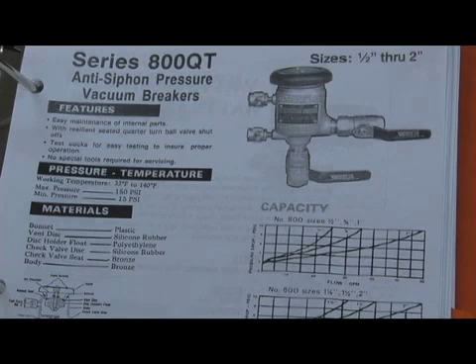So the original version was the Watts 800 series, which was produced from about 1982 to about 1993. Here's what the 800 series assembly looked like. Ball valves with the test cocks mounted to the body, which I'll show you the difference when we get to the M designations. Canopy on the top. Again, that's what the body looks like.

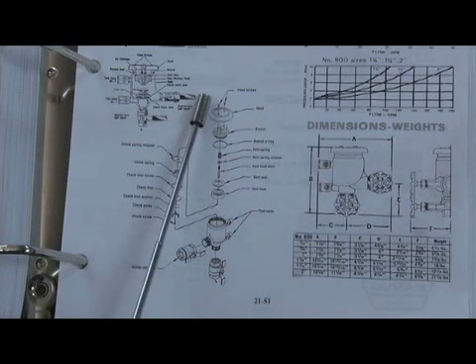Here's the internal parts with our check assembly, disc retainer, disc guide, disc holder, disc spring, check spring retainer, air inlet bonnet, poppet, and the spring and the bonnet assembly and canopy. So those were the parts in the 800 series. And again, this was produced from about 1982 to about 1993.

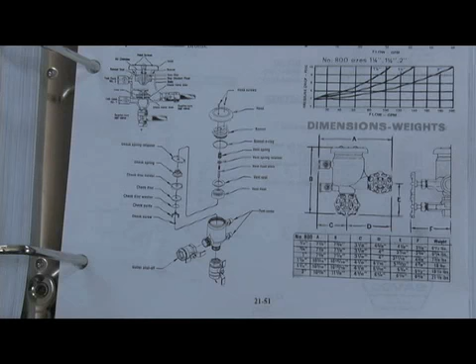In the early 90s, they started having a lot of problems with the air inlets being stuck shut or opening below the acceptable minimum of 1 pound. And they tried a lot of different things trying to get it to stop. One of the things they tried doing was epoxy coating the bonnet where the float disc sat, and other things. And then they finally just decided to remodify it and go up with an M2, M3 series. And let's take a look at those.

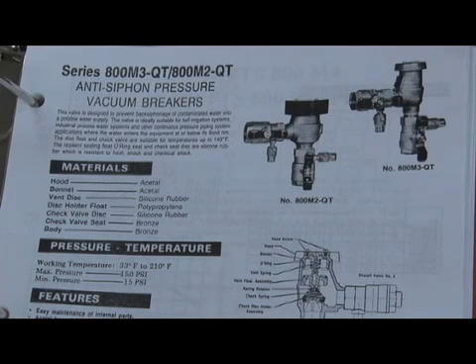The M2s and the M3s appeared different on the outside of the body. As we see here, it had a brass canopy on the smaller size. M3, M2s had a plastic canopy on the top, but the bodies even look different. This version of the M2, M3 was an upgrade of the 800 series, which they had troubles getting the air inlet open reliably. The check mechanisms were very similar. That same spring retainer design with that spring holder inside the body.

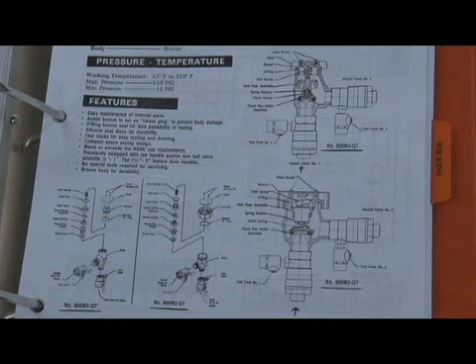What they changed was obviously because of the air inlet problems. On the air inlet, they went from a flat rubber disc to seal on the air inlet to an O-ring design, minimizing the amount of contact, which we'll show you when we take the assembly apart. So the dramatic difference between the M2 and M3 versus the 800 series: the check mechanisms were very similar, but the air inlets were dramatically different to help alleviate the problems they had with relief valve air inlet opening points below 1.

The M4 designation was the same M2 and M3 design as we saw earlier. The only difference was that the M4 incorporated a replaceable check seat. So the 800 series was the original version. M2, M3 were the modifications that changed the air inlet to have a more reliable air inlet opening. And when they went to the M4 designation, they used the same internal parts as the M2, M3, except they went to a replaceable check seat design. So 800, M2, M3, M4.

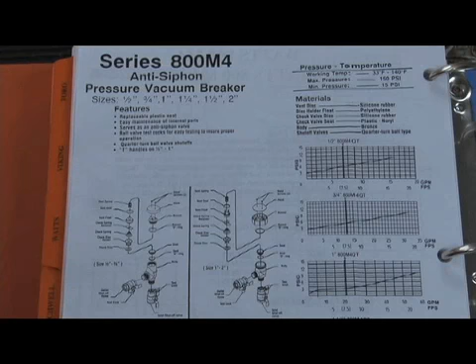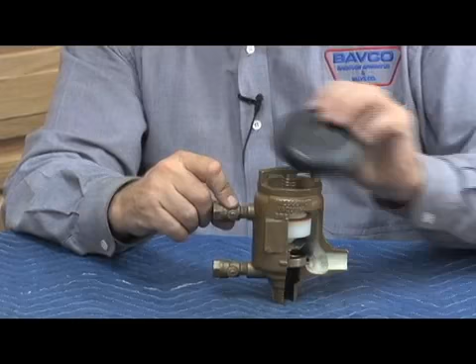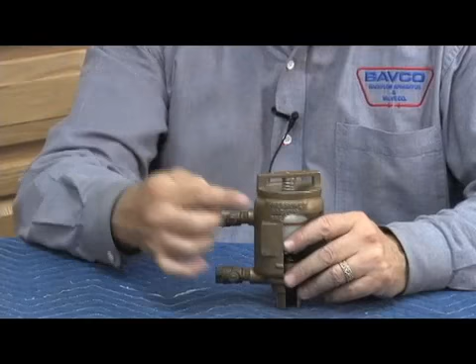But anyway, the canopy comes off the top. The canopy is an important part of this assembly. As we've said many times before, it makes sure things don't fall inside the body. Some people just consider it a splash guard, but it also keeps things from falling inside the body. The bonnet assembly unscrews from the top. It's a brass body here and a brass bonnet.

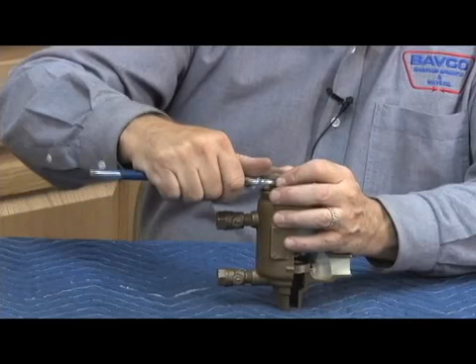To unscrew it required a crescent wrench, something like that, to break that brass on brass bond. On the 2-inch size, it got very hard to remove sometimes because of that brass on brass bond. Whenever you go to remove a brass on brass nut and bolt combination like that, it's not so much a strength issue. I can put a crescent wrench on here and put the strongest guy in the world on this, and it wouldn't necessarily be strength that would do it. It's a shocking action. Hitting it like that is what makes sure the bonnet comes off. The obvious problem with that is the piping system this is attached to.

You don't want to use that shocking action if you've got an old piping system, galvanized, rusted, ready to break. But that's the action you need to remove that brass on brass bond. The bonnet assembly unscrews from the top.

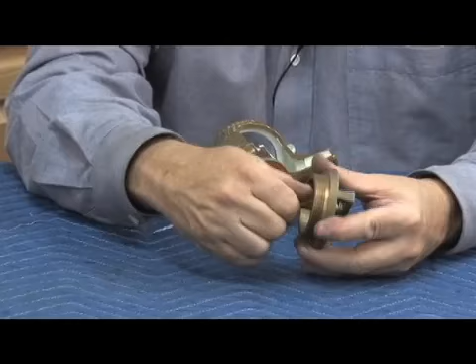The air inlet spring is set at the factory, and there is a little lead seal that's placed on the top of this stem, because you'll notice that this stem can unscrew out of here. And if I take that out, I can remove that air inlet loading, or I can actually change that loading, how it'll affect it on certain travel by moving that in and out. So the factory makes sure it's not adjusted in the field, puts a little lead plug right over the cover there, sets this at the factory.

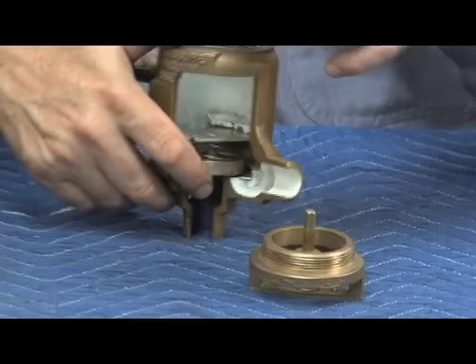Float assembly comes out next. Floats in one piece. They use a flat rubber disc as the air inlet disc, as you see right here, made out of silicone. Replacing the disc is just a matter of stretching it in and out of the holder, making sure it's all the way back into the retainer, just like that.

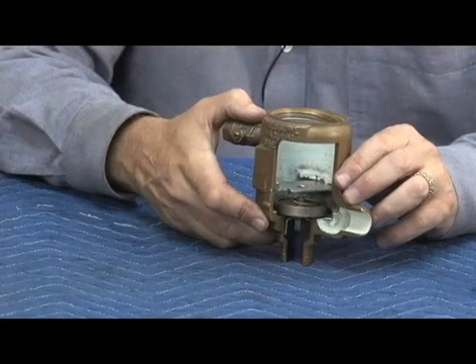Now for the check mechanism. Here's the part that causes the problem. Use a spring retainer. It looks like this. By pushing down, rotating it 90 degrees, it releases the spring tension, like that. Then the spring retainer will come out from the top. Spring, check assembly comes out next, just like that. Check seats are cast into the body. One screw holds the disc into the disc holder.

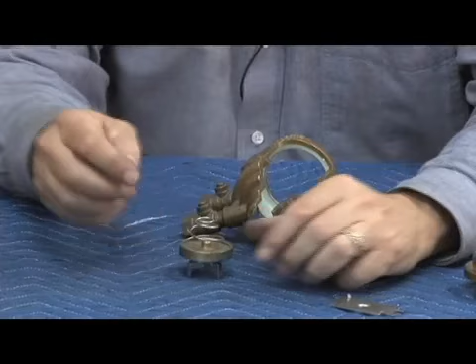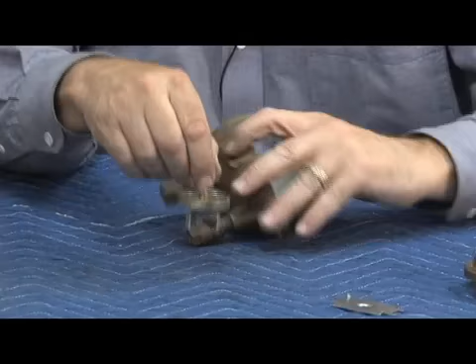Reassembly is a matter of putting it back together. After we change the disc, putting our spring back in here. It's a good idea to take that spring and just put a little tension on that clip. It'll hold inside the check body, which makes it a lot easier to get it back inside the body. So now we want to get the spring retainer in place, and the function of that spring retainer is to push down on that spring.

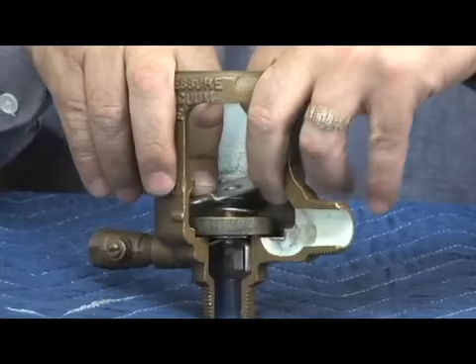Keeping this perfectly flat is critical to make sure the load on our retainer is pushing straight onto the disc holder. So we're going to insert it in from the top, pushing down, rotating 90 degrees, making sure that the spring retainer is sitting flat underneath the clips here and on the back side here. Making sure it's flat just like that assures that we're pushing down equally on that spring and giving us our loading.

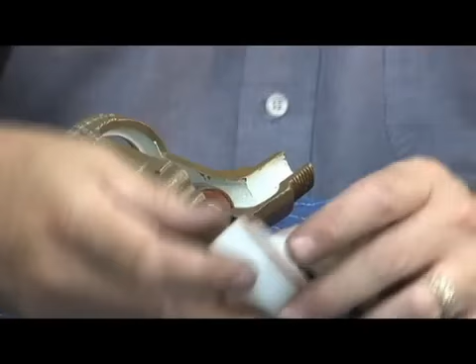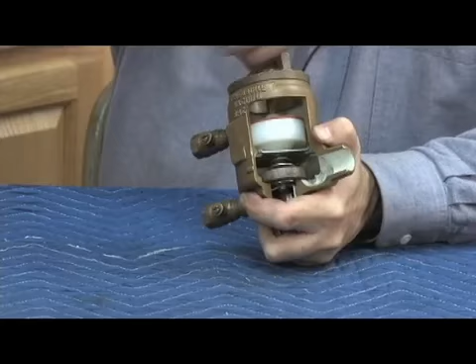Now, the air inlet, float assembly, we changed our disc. Bonnet assembly, O-ring on the outside. Reinstall back into our body. Allows us to reassemble. Again, it's an O-ring seal on the top, so the bonnet does not have to be overly tightened, yet unfortunately, because it's a brass-on-brass bonding, a lot of times removing it gets to be a problem. Don't forget to put your canopy back on top.

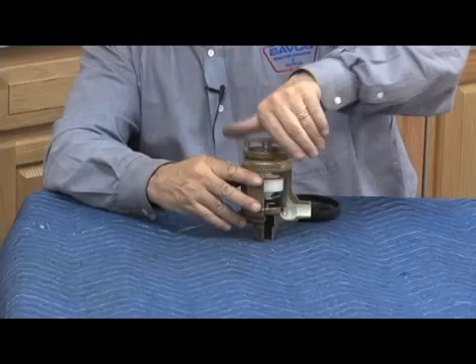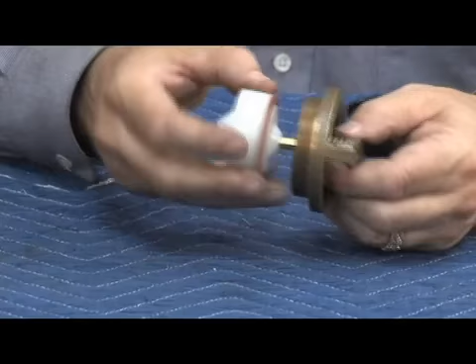That's the 800 series. Now, the problem they had with this design, and led to the revisions, had to do with this air inlet assembly. The air inlet assembly sits like this, and you notice it's a relatively wide disc area in relationship to the air inlet seat. And what happened on a regular basis is the spring loading, which was in this stem right here, made it so that the air inlet did not come off. And hopefully nobody adjusted it in the field, which they didn't because of the lead plug. But anyway, you can see the movement I have there.

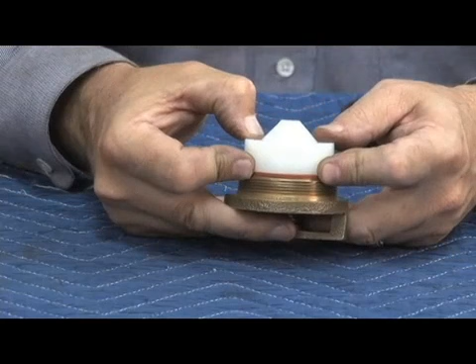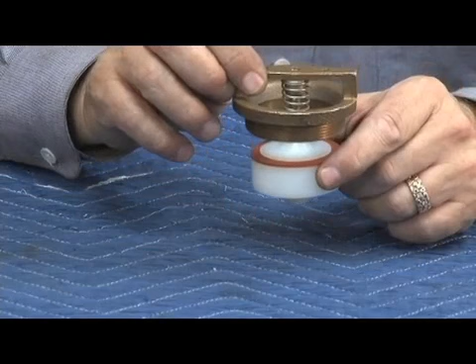Anyway, it would be like this, and what would happen is the silicone disc would literally bond to the seat. And as the air inlet went to open like this, the disc would not come off of the seat. If you remember in our pressure vacuum breaker test procedure, not only do we get the point where the air inlet opens like that, but the next step is that we have to drain the body, right, to make sure that the poppet drops all the way down. Well, guess what? In the 800 series, it didn't drop all the way down reliably. So they wanted to come up with a way that the air inlet wouldn't be bonding to that as hard.

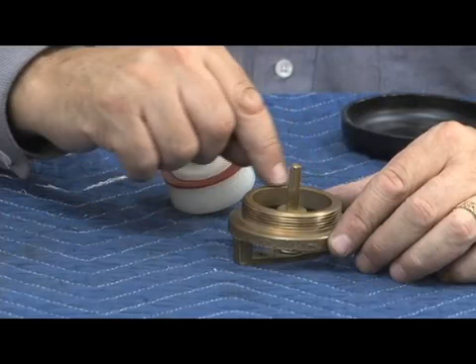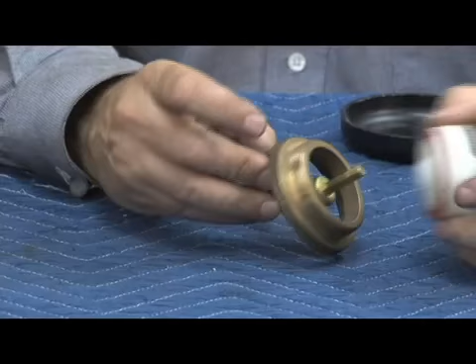First thing they tried doing was what was called a polycoater, actually a polymer coating that they put on the brass bonnet itself. The thought process was if they had a smooth surface here, it wouldn't bond as it would to the brass body. So sometimes you may see some of these bonnets where it looks like it's got a plastic gray coating on the bonnet. That was one of the attempts they tried to make the air inlet open more reliably.

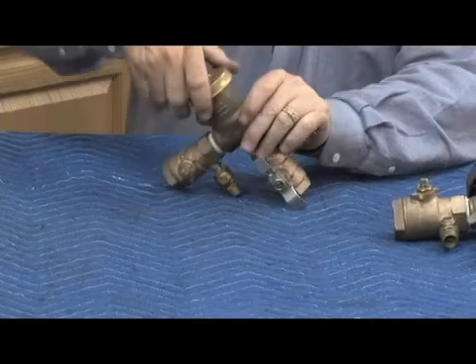They still had problems with it, and that's what led to the M2 and the M3 designation. So let's take a look at the M2s and M3s real quick, starting here with our M3. You'll notice that the check design is almost identical to what we just saw in the 800 series. That same spring retainer with the 4 clips, obviously a little bit smaller, so we won't bother worrying about that. But let's take a look at the air inlet.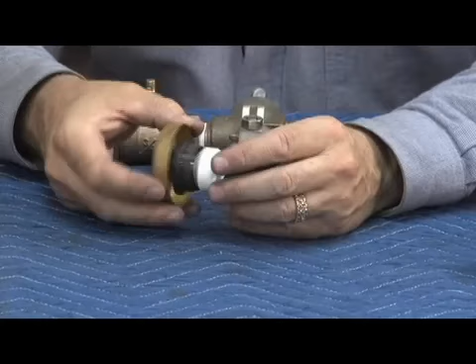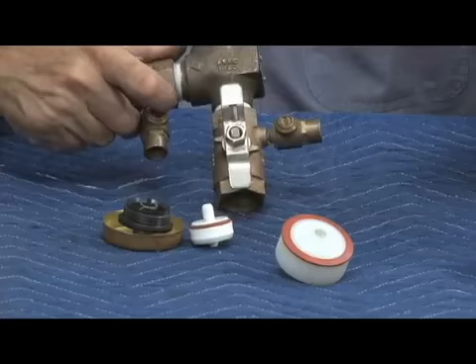So here's the air inlet off that M3 designation. The screws came off the top, canopy came off, air inlet assembly, and air inlet spring. Now remember, with the 800 series, we had that large flat disc with the large seat. Notice this being a 3/4 and this being a 3/4. Look at the difference in the air inlet floats. The old 800 series, it was much larger, and the problem of bonding to that bonnet happened quite regularly. So they went to a smaller bonnet area.

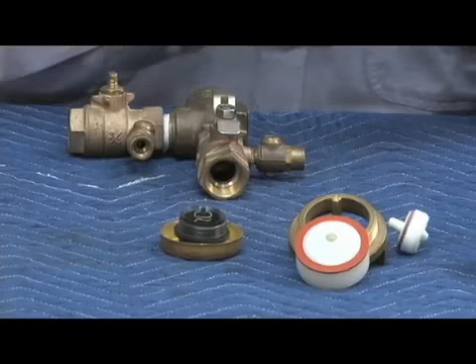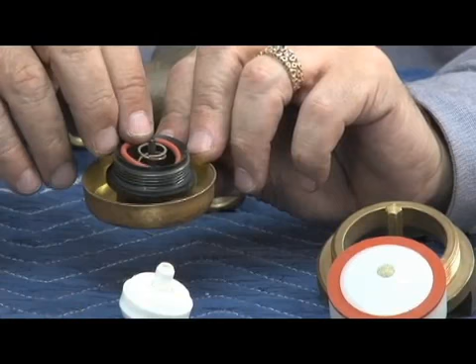They also went to, instead of using a disc, if I can get it off, an O-ring design. And we know that an O-ring is easier to seal than a flat disc. Also, if you notice up close here, the seat is not flat now. It's chamfered or at an angle. So as that O-ring goes to seal on that chamfered area, just like that, because the O-ring's got to sit in a slot, remember? It sat right there and had a more reliable air inlet opening. So this seemed to eliminate the problems for Watts.

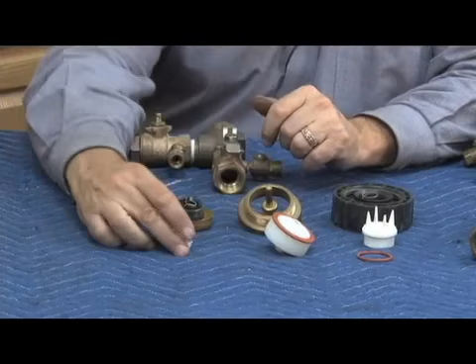And in the M2 designation, the larger sizes, a little bit different looking than the 800 series, but similar. The whole bonnet unscrewed, same basic design using an O-ring as we saw in the M3. So this was the change. Original 800 series, M2, M3 designations like this. The check seats were cast in the body. The check mechanism was similar to the 800 series like I've already showed you. So what led to the M4 designation was the adoption of a replaceable check seat. So in the M4s, it's the same internal parts as the M2 and M3, except their seat was replaceable, and here's what the 2-inch M4 check seat looks like, sealed in by an O-ring, screwed into the bottom of the body.

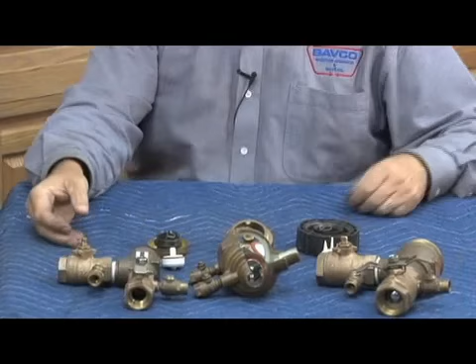So the original 800 series had problems with the air inlet opening. They fixed it with the M2, M3 designations, giving us the more reliable air inlet opening by going to an O-ring design on the air inlet. Not only did they go to an O-ring design, remember the guiding mechanism, you always hear me talking about guides, on the old 800 series was the single one through the center, where the M2, M3 designation had the 4-pronged guide and had the air inlet spring like this. And the M4 designation incorporated a replaceable check seat unit. So that's the 800 series pressure vacuum breakers, M2, M3, M4.

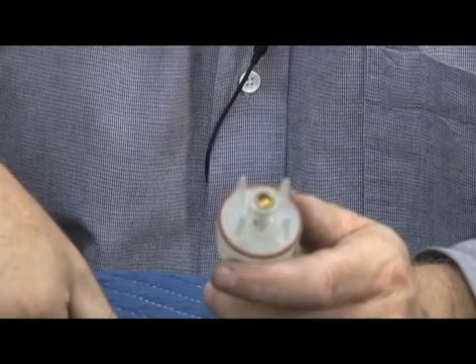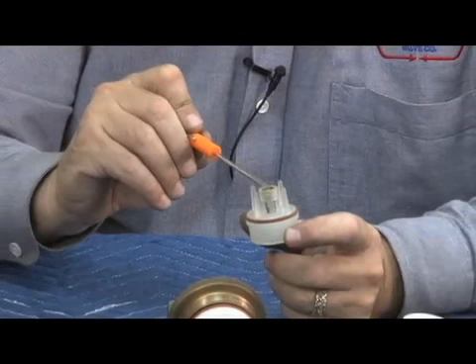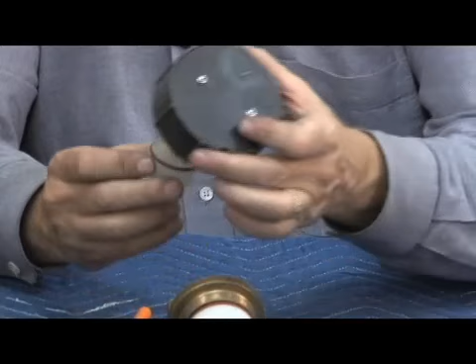The only other point that I wanted to show you was there's an M4 FR. FR stands for freeze. And if you look up very close, here's a version of the regular air inlet, the white one on your left, and the FR version, which you see here in the center. What they added to it is the centerpiece here, and the centerpiece is a relief valve. You'll notice there's a small little round, almost BB-shaped thing in the center of a disc, and a spring underneath. This was installed to make the FR series a freeze-resistant pressure vacuum breaker.

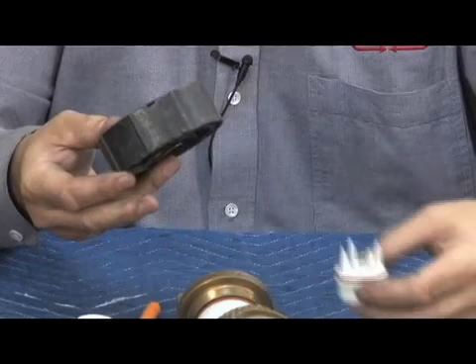When freezing occurs, as we mentioned earlier in the seminar, water will expand about 9%. The 9% expansion increases pressure. That increase in pressure may rupture that body, which is what we're trying to avoid. And with the old version, the body ruptured, you'd have to replace it. So they thought by changing the poppet with this relief valve in the center, as it sat like this, when freezing pressures happen and that pressure increased right there, it would sense that pressure increase, open up this relief valve and relieve that pressure in a freezing condition.

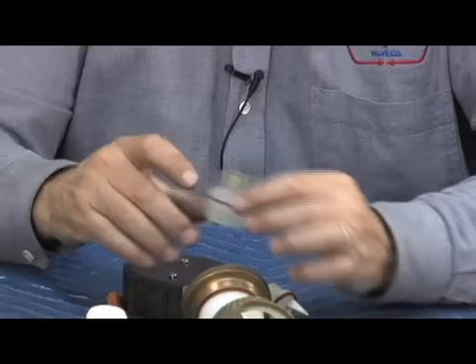So the air inlet assemblies are different. You can see here's the standard one, and here's the freeze version of the FR. So that's the 800 series. Original 800, M2, M3s, and M4 with the replaceable seats, and M4 FR with the freeze protection. Those are the pressure vacuum breakers from Watts.

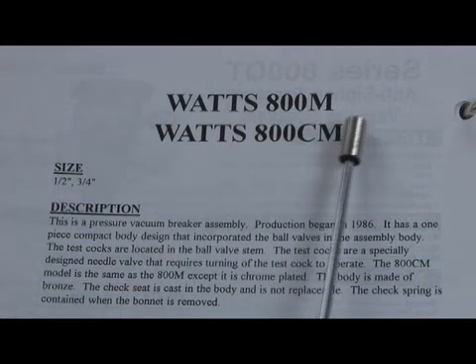The next assembly we're going to discuss in the Watts world of pressure vacuum breakers is the 800M designation and the CM designation. We've talked earlier about Watts models and the M meaning a modification that took place on the specific assemblies, but this is one time that the M was used for a different interpretation, and the M stood for medical. So this is an 800 pressure vacuum breaker medical valve. The CM is a chrome-plated medical valve.

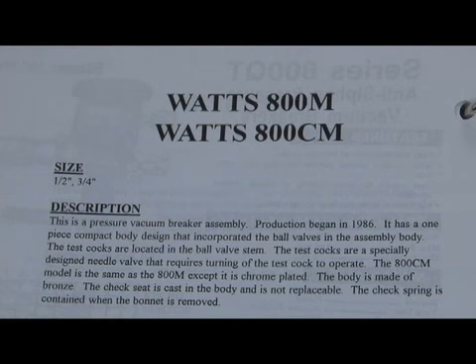It was used where a compact design was needed for installations. Medical applications, meaning like in wall enclosures inside of walls of surgical suites and places like that where they wanted a very compact body design. Here's what the medical version of that pressure vacuum breaker looked like.

First and most unique thing was that the shutoff valves were integral or built into the body of that assembly. So this portion here had to use a crescent wrench to turn the ball valve. And then in the stem of the ball valve handle was a needle valve, which was our test cock. So in our handle, we had the handle to shut the ball valve off, and we also had a needle valve test cock instead of the standard quarter turn type test cock.

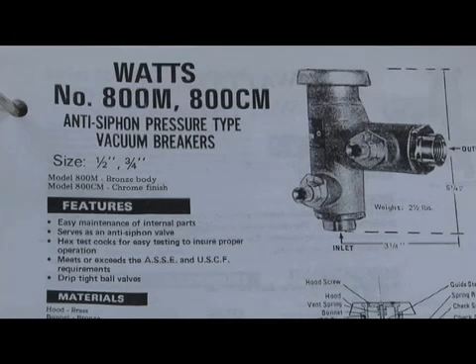So here's a schematic drawing of that particular assembly. The same basic check mechanism as we saw in the 800 series, and the air inlet assembly is similar to what we saw in the 800 series, not the M2, 3, or 4 designation, with the flat air inlet disc.

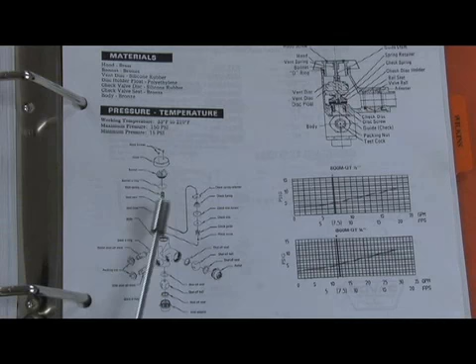Here's the exploded view showing you the integral built-in ball valve stem. There's the ball for that stem, and in the center of that stem was our test cock. Check assembly had that quarter turn rotation of the spring retainer to hold the check in place, and the air inlet screwed out from the top. So let's go ahead and take the 800M CM assembly apart real quick, see what it looks like inside.

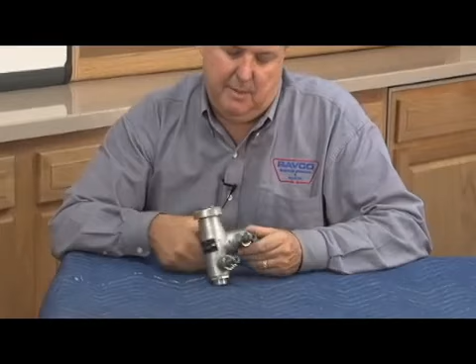Here's what the 800M version looks like. This happens to be a CM because it's chrome plated, so it's the 800CM version. The M is the same thing except it's a bronze body. And again, the M was for a medical application, and it was meant to put into compact installations where pressure vacuum breakers had to be installed in areas like inside utility boxes and walls or someplace where they wanted something very compact.

Anyway, first and foremost is how do you shut it off? No, the ball valves are not missing. The ball valves are integral and built inside of the body. You can see the ball in here. The stem on here sticking out is my wrench flat. In other words, here is where I grab it to turn the ball valve. By putting my crescent wrench on that point, turning it quarter turn, it operates just like a ball valve.

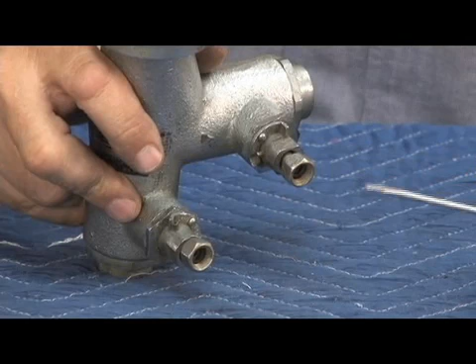This outer portion, if you notice, is a needle valve, and that's where my test cock is tapped. So my test cock taps all through the center of the ball valve stem for my test procedures. So that's for testing. That's the ball valve for shutting it off. There is no handle on this model. You have to use a crescent wrench to turn the handle on and off. Okay, so that's what it looks like. Let's go ahead and take it apart now.

Take the cover off, canopy off from the top. 2 screws come off. Same basic bonnet mechanism as we saw in the 800 series. Air inlet spring, which is not set at the factory, it's a loose spring. Our air inlet disc poppet assembly comes out next. And that check assembly is the same as we've seen in the 800 series with that quarter turn rotation with the 4 guides on the check.

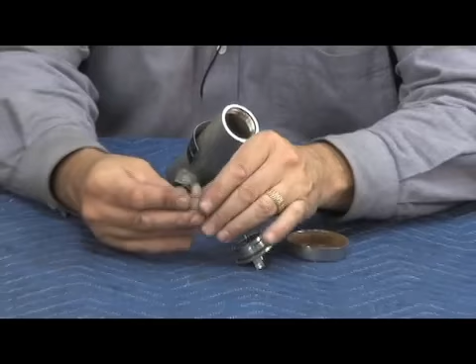So here's what the air inlet assembly looked like. The disc stretched in and out of the holder, just like that. And bonnet assembly. Reassembly is going to be just the reverse. Get our disc back into the holder. Bonnet assembly back with the poppet. Have it ready to go back into the body. And tighten it back down, O-ring seal, canopy on top. That's our 800M, or in this case CM model of assembly.

Again, the tag was held on by 2 little screws and fell off quite frequently, as this one's almost ready to do. So a visual indication of this was necessary, because unfortunately you'd walk into it and look at it and not be sure what it was from those ball valve handles and the test cock sticking out. So that's the 800M, in this case the CM version.